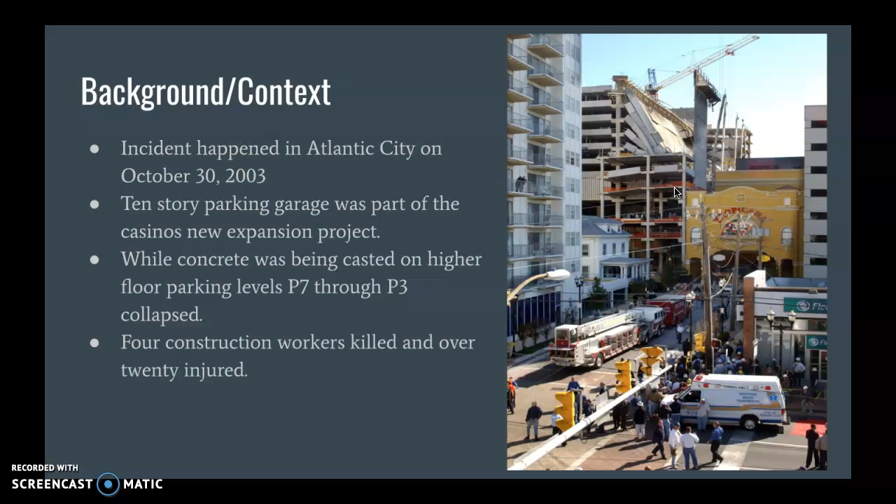So some background and context of this collapse. The incident happened in Atlantic City, New Jersey on October 30th, 2003. The incident took place at a 10-story parking garage that was part of the casino's new expansion project and was still under construction. While the concrete was being cast on the higher floors of the parking garage and still settling, floors P7 through P3 collapsed, and as a result, 4 construction workers were unfortunately killed and over 20 people were injured, suffering major to minor injuries.

The building construction was still in progress, as mentioned, upon collapse. It was designed to be a 10-story tall parking structure to add additional parking for the casino and the resort. The slabs on levels P4 through P8 were cast in intervals of approximately 1 week or more. So each week an additional slab was added. Levels P8 through P4 were cast on October 30th, 18th, 10th, the 2nd through the 3rd, and September 22 through 24, 2003 is when the first floors were built on the structure.

This implies that the concrete on all levels, except for P8 and P7, had achieved full concrete strength by the time of collapse. This allowed enough time for the concrete to fully settle, harden and attain maximum strength. But because P8 and P7 were the most recently laid, they had not reached full strength.

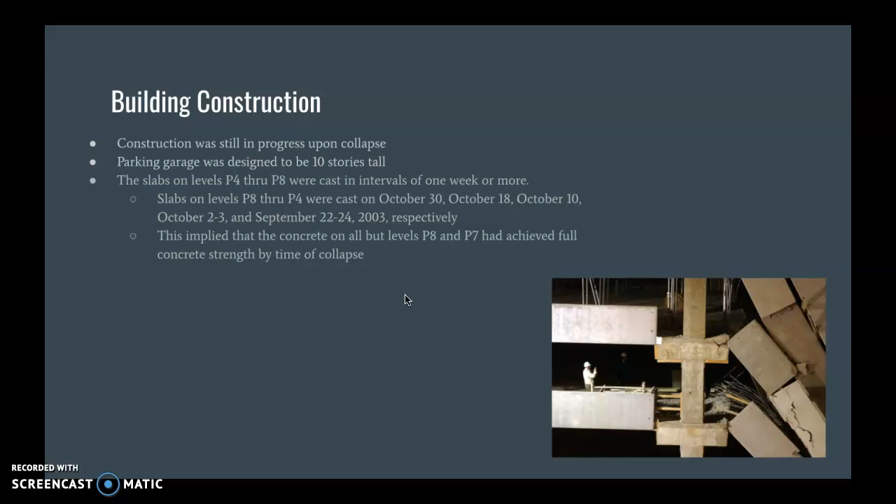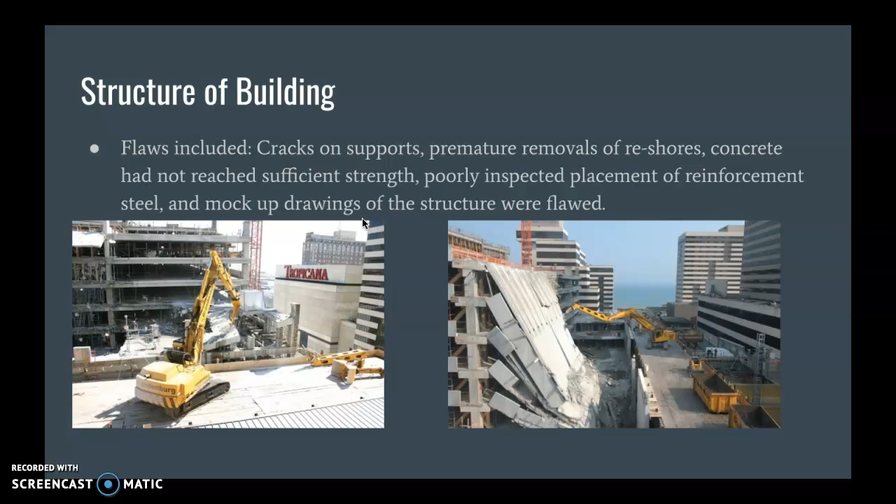Some flaws were included in the structure of the building. There were some cracks on the supports and premature removal of the reshores. The concrete had not reached sufficient strength on all the floors before they were adding additional layers. There was poorly inspected placement of the reinforced steel, and mock-up drawings of the structure were flawed as well. So there were multiple structural errors in this building project.

The parking garage was built with a filigree wide slab composite type concrete construction. This is a process for construction of concrete floors where there are 2 interconnected concrete placements. One is generally precast in a factory and brought in, and the other is done in the field, where they overlay on each other.

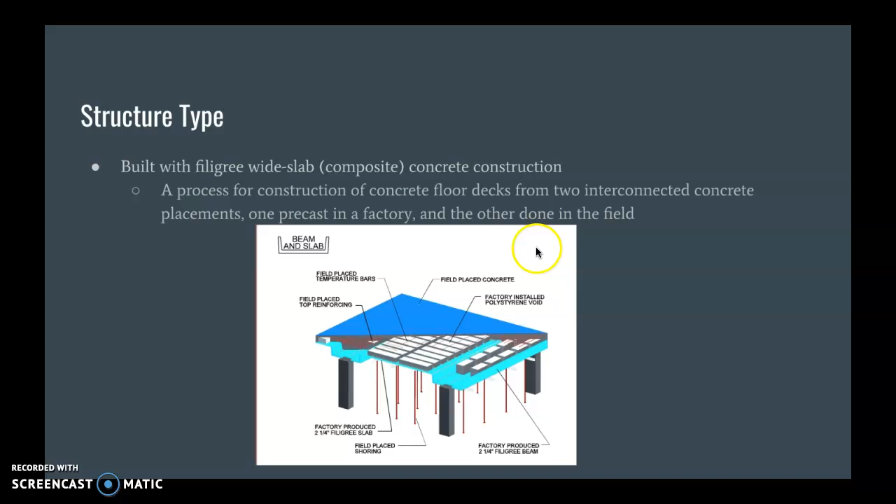The frame was weak. Unfortunately, there were inspectors there, but no inspector noticed the absence of proper rebars in the concrete while it was being poured, and they were never placed on P4 through P8, and those were not caught by inspectors. The absence of these rebars significantly compromised the integrity of the structure and contributed to the collapse from weakness in the frame.

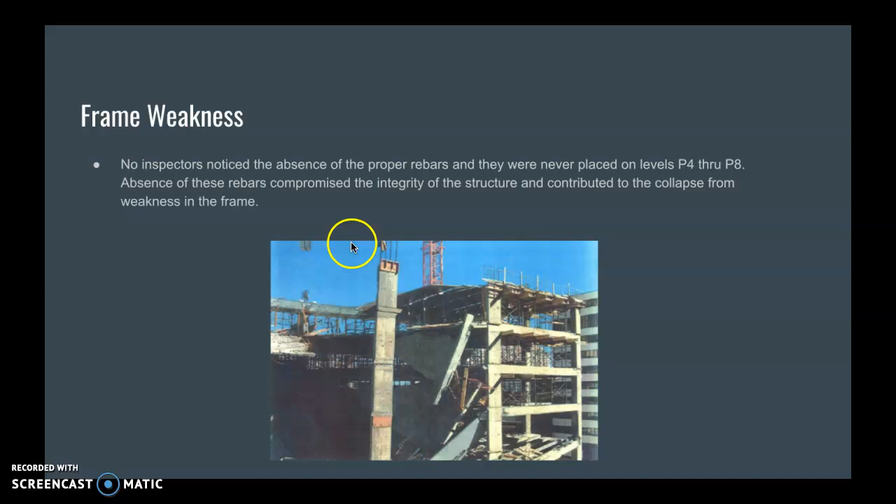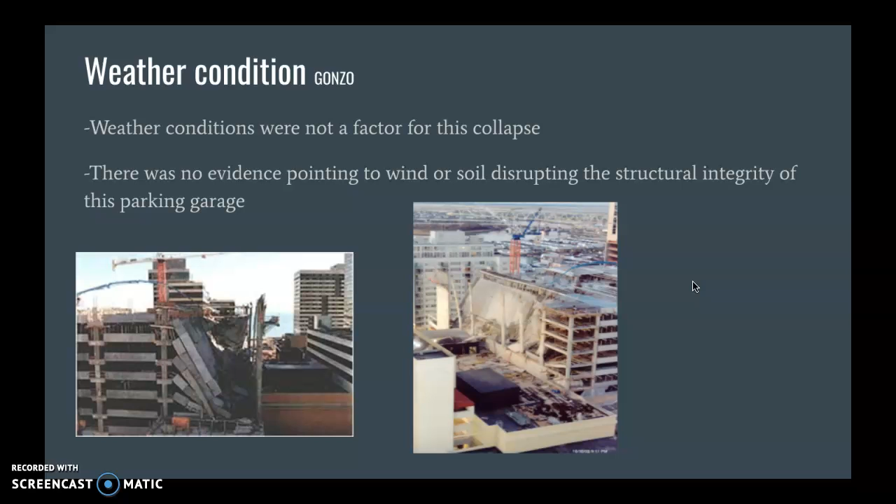Weather conditions weren't actually a factor in this collapse. There were no reported high winds that day. It was a normal fall day, and there was no evidence pointing to any soil disruption or movement of the foundation that had any effect on this collapse. It was purely mechanical, based off of the structure itself.

Some reasons for the collapse. The main factor that contributed was the cracks along the exteriors of the slabs and beams that were not noticed by inspectors. The shores were removed before the concrete was fully set. That was another major error that took place.

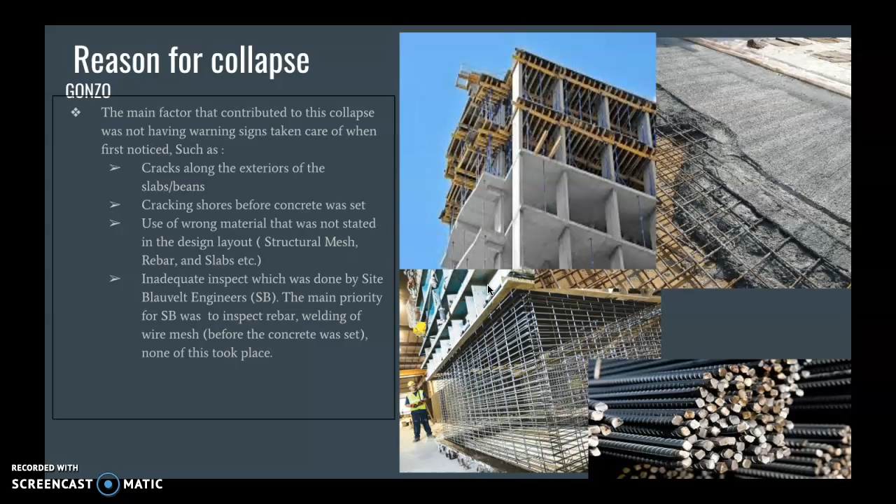Another element of this is they used a lot of wrong materials that were not up to code at the time. The structural mesh that they used to replace rebar is cheaper, but it did not have as much support as the rebar would have had. And again, as mentioned, there was inadequate inspection by Site Blauvelt Engineers. Their main priority was to inspect the rebar, and none of this took place. They would have noticed the lack of sufficient rebar that was replaced by a wire mesh instead.

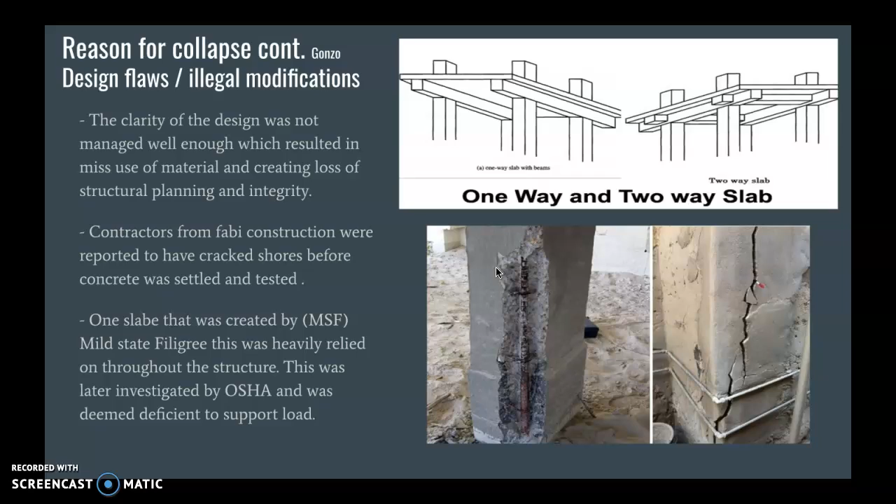The outcome of this collapse, again, unfortunately, was a loss of 4 lives. They were the construction workers working on the upper decks when it collapsed. 21 more people were injured as a result. Damage from the collapse also collapsed additional decks around it. The lower floors were also damaged as well; they just didn't fully collapse. And upon further review, additional issues were found within the building construction that were red flags and were not caught prior to the collapse.

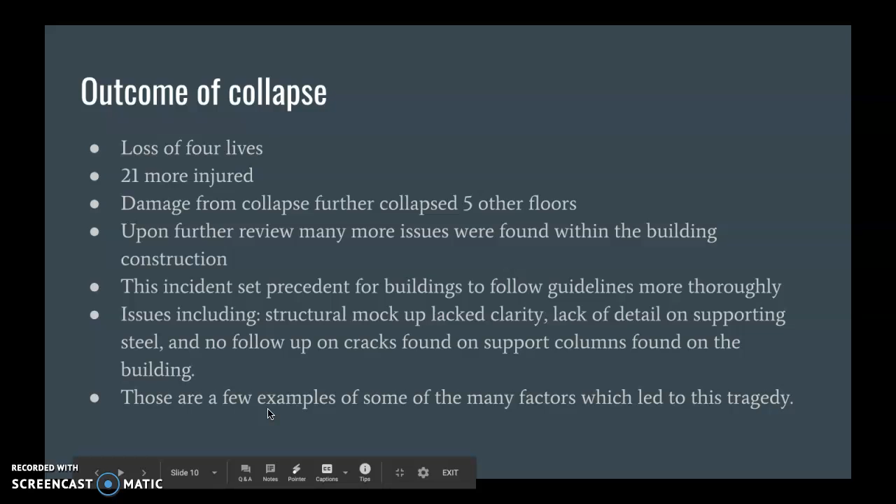This incident had an impact, and it set a precedent for buildings to follow guidelines more thoroughly. The guidelines were present while this building was going up in 2003, specifically for concrete structures, but they were not followed properly, and the inspection was not carried out thoroughly. Some issues include the structural mock-up. It lacked clarity and detail for the supporting steel, the construction team overlooked those details, and there was no follow-up on the cracks found on the support columns. Again, these are some of the factors that led to this outcome.